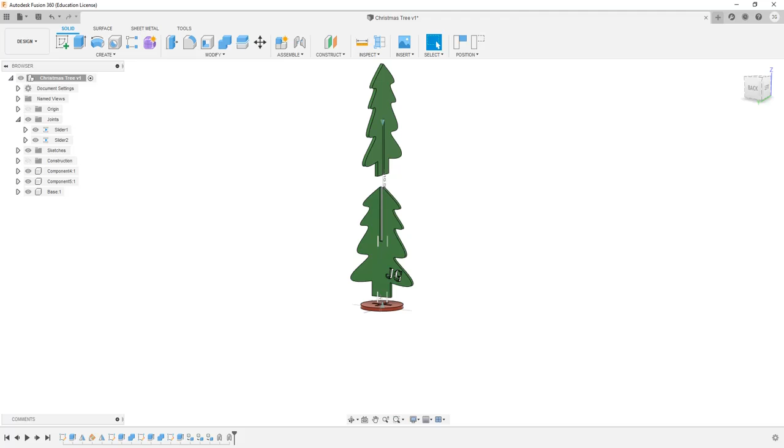Okay, so Woods and Plastics Christmas tree project. We're going to make this Christmas tree that we can laser cut and sort of slide together to assemble.

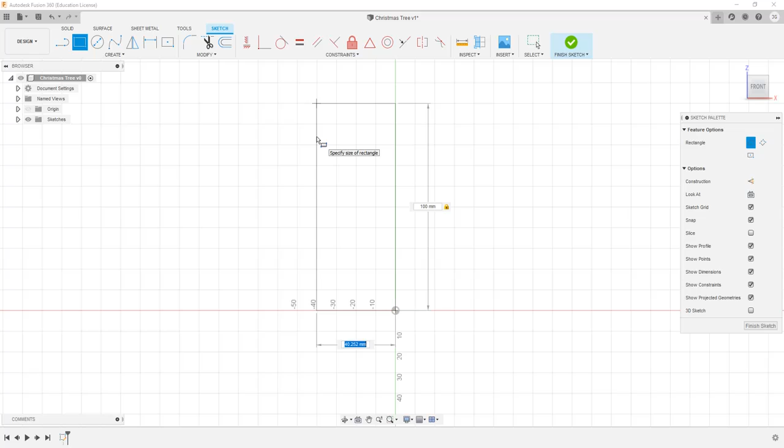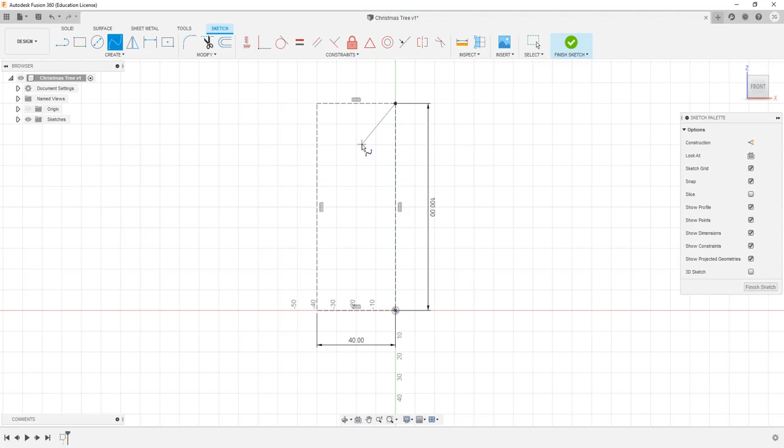Okay, we're going to start by sketching half a Christmas tree. Draw a rectangle 100mm and 40mm wide from the origin, just a box to draw the tree in, to make sure we get the right size tree. After selecting that box, double click to select the outline. You can make that a construction by clicking X on your keyboard, and those are construction lines, so you can't use them for extruding, but they give you a sense of the size of the Christmas tree.

So just with the spline tool, I'm going to draw the Christmas tree. Don't get too hung up on the size or shape of it at the moment, because we're going to change it later on at the end, once we make sure we're happy with it. So that's a pretty good start.

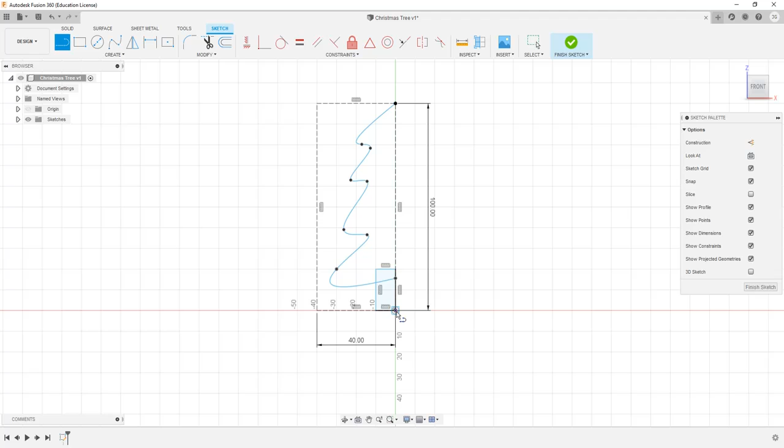And then rectangle for the base, and that needs to be 10mm wide and go up into the Christmas tree. I'm also going to draw a line, L on the keyboard, from the top to the bottom, so I have an enclosed space that I can extrude. So that is half a Christmas tree.

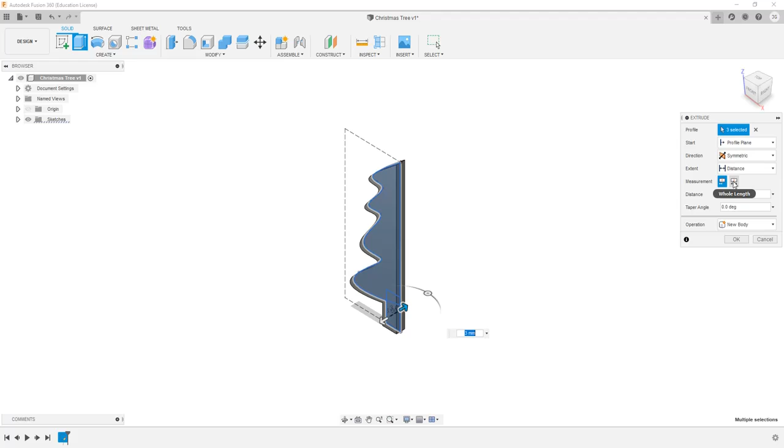Finish the sketch, use the extrude tool to make that three-dimensional. Select all the profiles. The material we have is 3mm thick, and I want to make sure I get that symmetrical. So symmetrical, 3mm thick for the whole length.

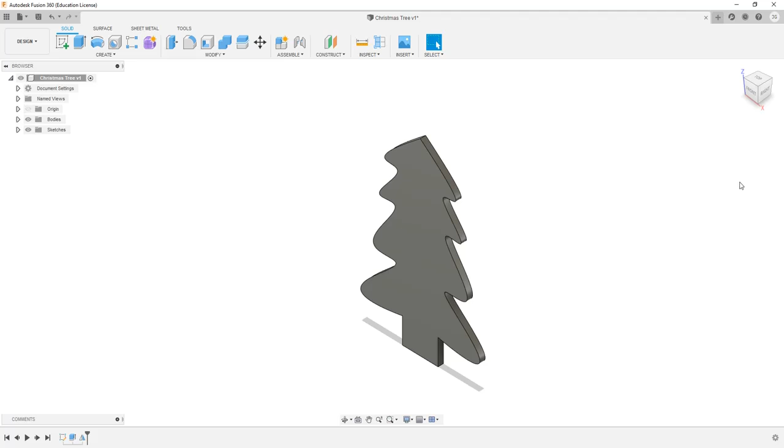Okay, so that is half a Christmas tree. And now we use the mirror tool to make the other half, to make sure we are symmetrical. So I make sure I select bodies and the body that I want to mirror, and then the mirror plane is the plane there. So that has made a full Christmas tree.

Now I'm going to construct a plane at an angle so I can make the other half of the Christmas tree. Select that blue line, the Z axis, and make our plane at 45 degrees. Then we use the mirror tool again on the Christmas tree, and this time the mirror plane will be that 45-degree mirror plane that we just created.

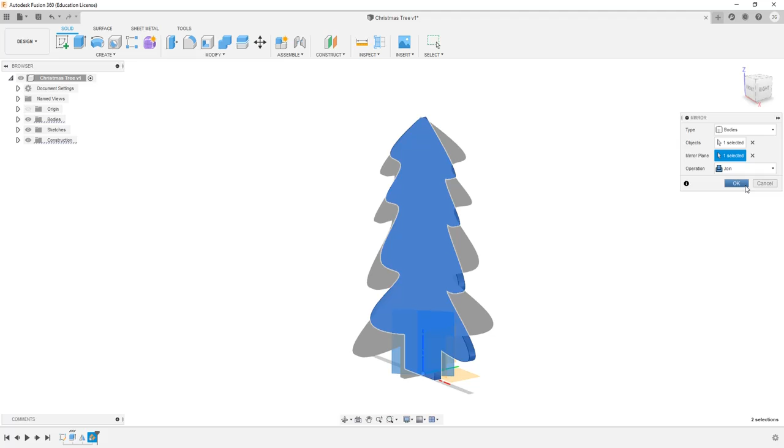Okay, so I now have my two Christmas trees. If we go into bodies, I can see I only have one body. So I'm just going to double click on the mirror operation in the timeline. The operation I used there was join, and that joined the new Christmas tree to the old Christmas tree, so we only had one body. So I'm going to set that to new body. You can see now we have two different Christmas trees.

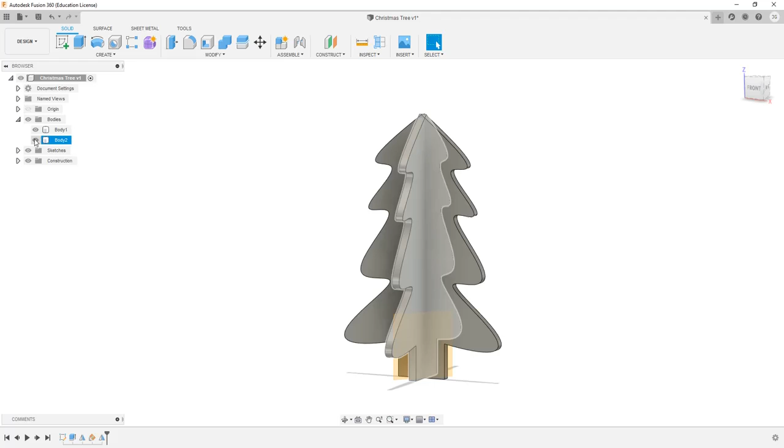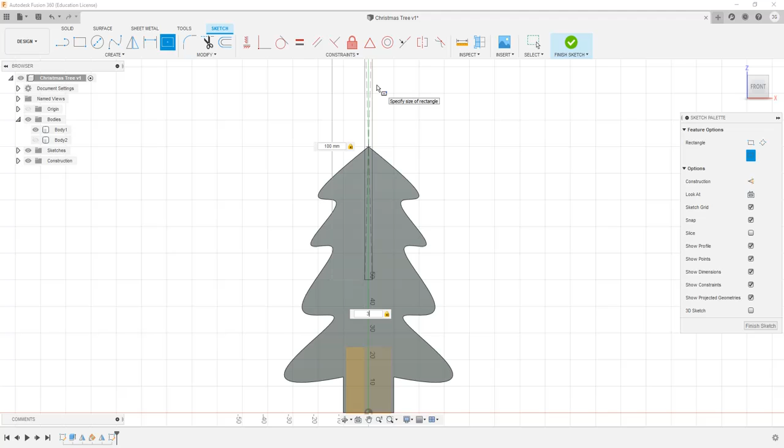So that's great. I'm going to hide that second Christmas tree, and we will create the cut slot for the first one. Again, I'm going to create a sketch for the cut slot, using the center point rectangle tool, and snap that to the top of my object. I'm going to make it 100mm high and 3mm wide, because that is the width of our material.

I'm going to use the extrude tool to cut the slot. Okay, so I now have a slot in one of the Christmas trees. And now I want to get the opposite slot in the other end of the Christmas tree.

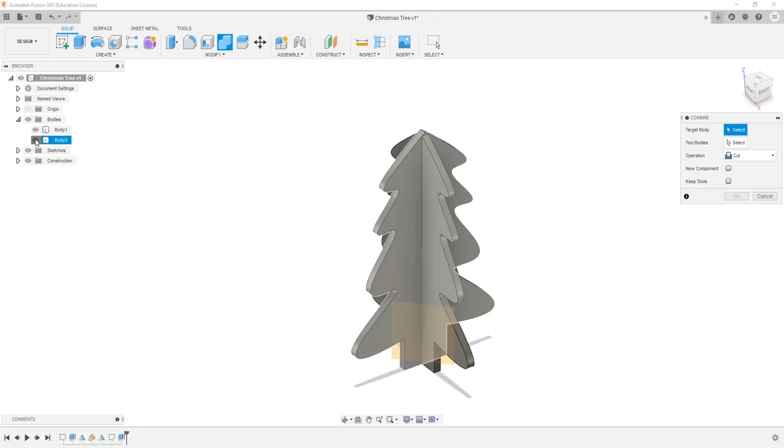So what I'm going to do for that is use the combine tool. What I want is to change the second Christmas tree, and I want to use the first Christmas tree to do it. I want to set that to cut, and that will cut the slot in the second Christmas tree.

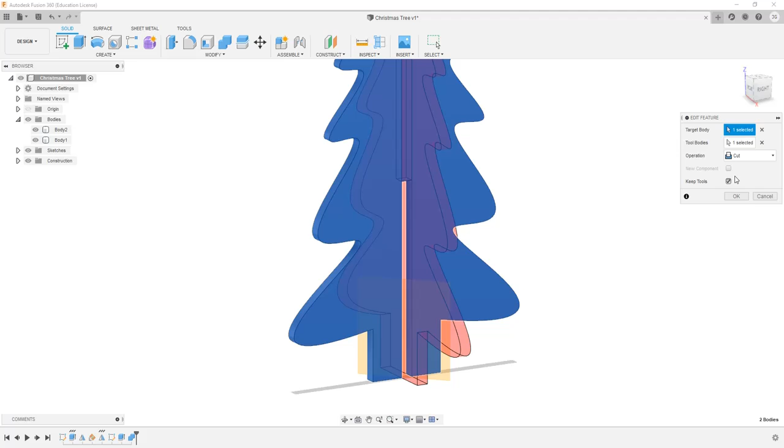But I lost my first Christmas tree, so again, double click. I needed to click the Keep Tools button. So now I have both Christmas trees, and they both have slots, so they'll line up perfectly.

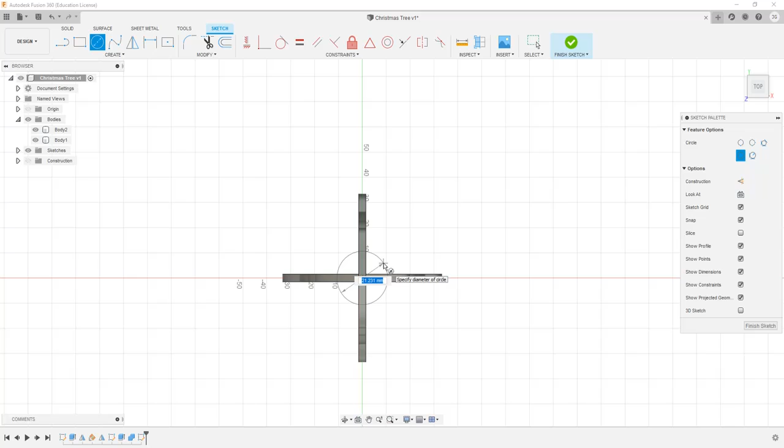Now we just need to create the base of the Christmas tree. In the top view, create a sketch, and I'm going to make a circle, and the circle's going to be 40mm. Use the extrude tool, extrude that up 3 millimeters.

You can see by default it wants to make that cut and cut the bottom of the Christmas tree off, but that's not the operation I want. I also don't want to join because that would join them all together and make one body, so I want to make it a new body.

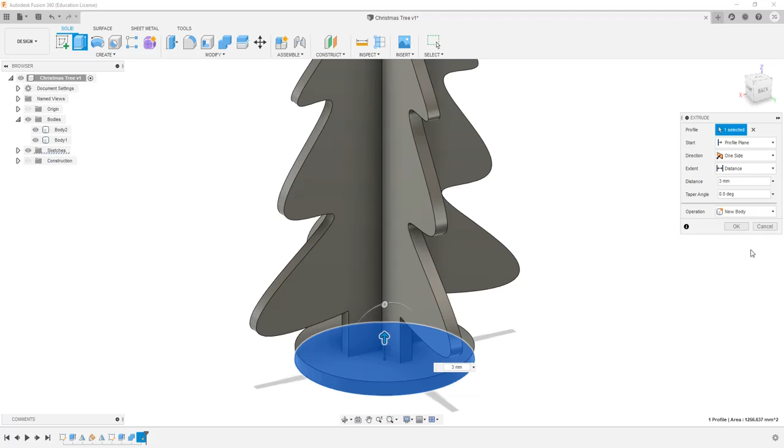And so now I have the base. I need to rename that base. And I just need to cut some slots in that base.

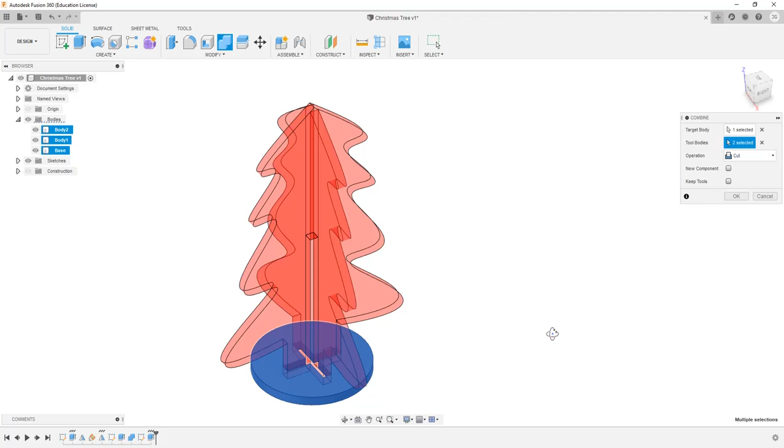So again, I'm going to use the combine tool. I want to change the base, and I want to use the 2 Christmas trees to do it. Keep tools. Perfect.

So again, I'm going to add my initials to this by creating a sketch on the Christmas tree.

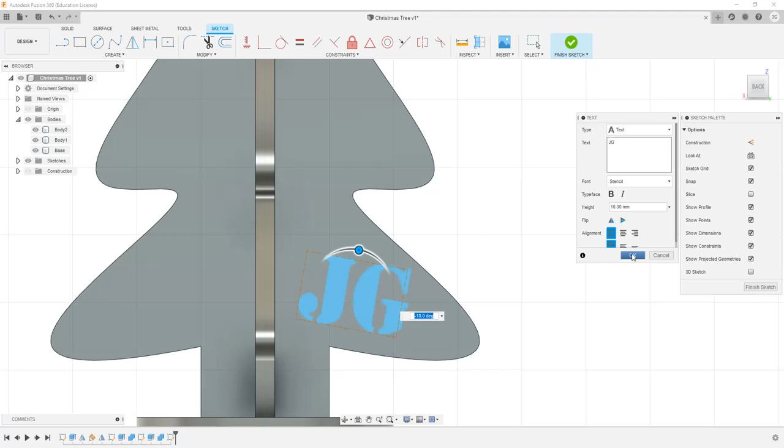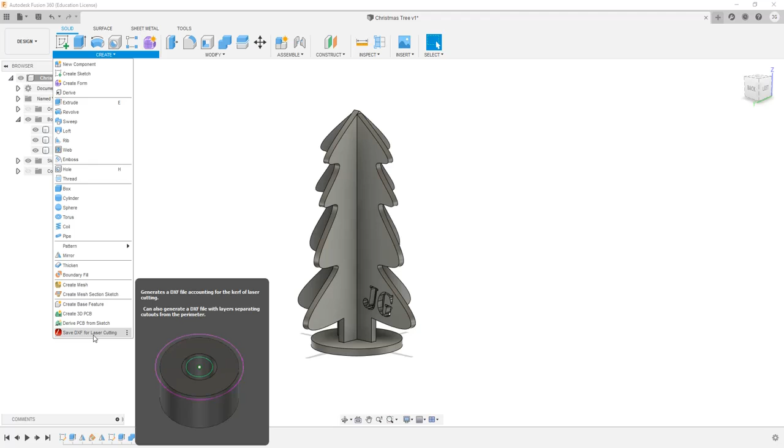Okay, now we need to get that ready for laser cutting. So I need to use the plugin on each face that I've created. Let's go through these one at a time.

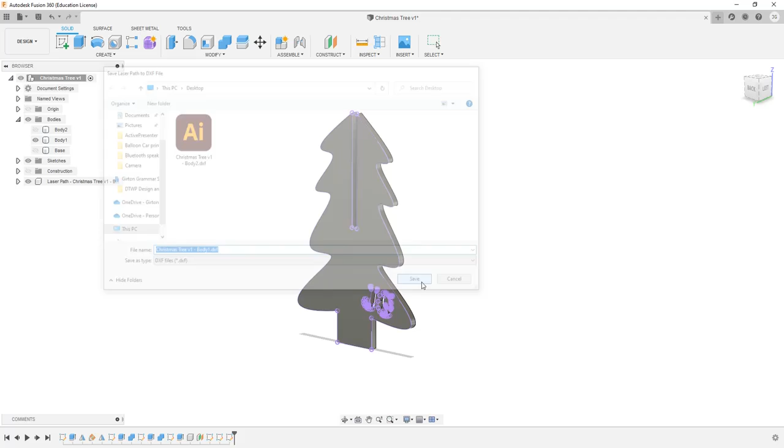I need that file there. I need this face. And I need the face on the base as well.

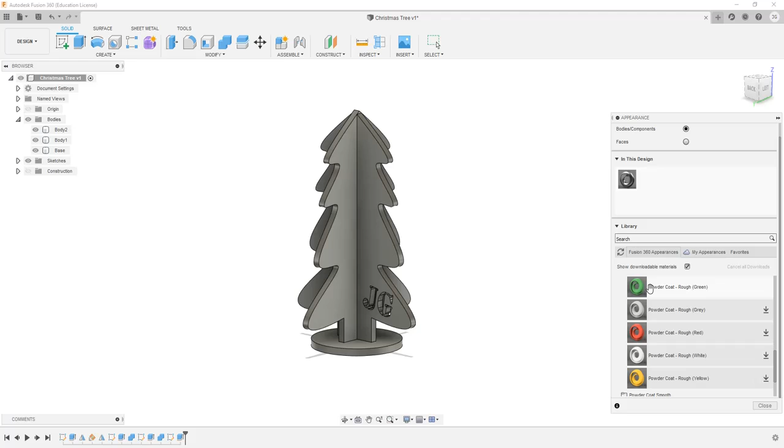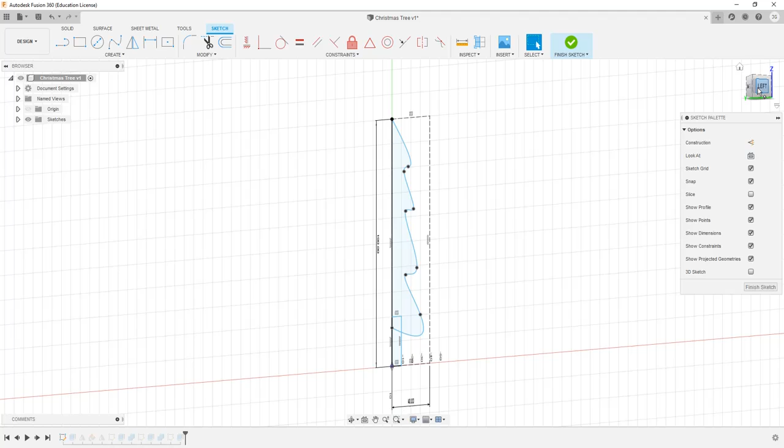Alright, so if you're not happy with the way your Christmas tree looks, you can just go back and edit that first sketch that we made. And remember, if you click on the spline, you can get the handles and adjust all of those to get a Christmas tree that you're happy with.